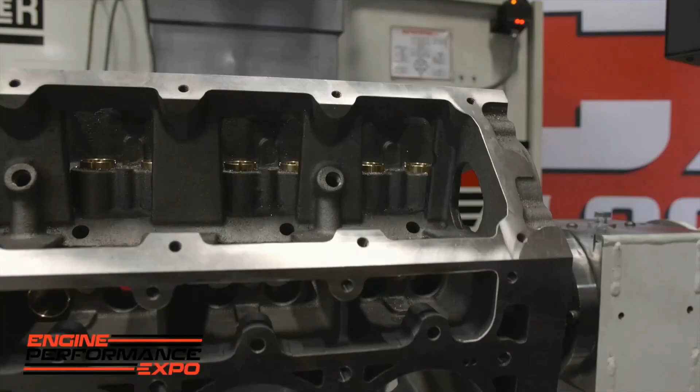I feel like we've had great success avoiding little glitches here and there, but every now and again you're going to have one with our videos. So these guys are re-racking the film on the film projector. Yep. Oh, wait. Bottom line, we're going to get to it as soon as is possible. They're going to figure out the video. And if not, you know, we got the man who is in the video right here, so we're going to try to deal with it.

But interesting, the conversation that was just happening off the air. We do not remain silent in between these sets. You were talking a little bit more about Spintron, and what Warren was saying. People are very interested in the pressure on the valve train, and Warren was kind of delving into that area a little bit. Yeah, so a couple of the questions had been about, well, the Spintron doesn't simulate the effects of the pressure or negative pressure in the intake tract and the exhaust.

Well, as Warren was talking about earlier, there's all of these dynamics, these pressure waves. Even Billy was talking about it, that you've got these pressure waves. So that pressure isn't static, it's very dynamic. And the whole other part of this to me is that if you take the fact that that's a variable and it's going to change engine by engine, by not having that, you're reducing the noise that could confound your information, because at the end of the day, what you're trying to do is make that valve train system stable.

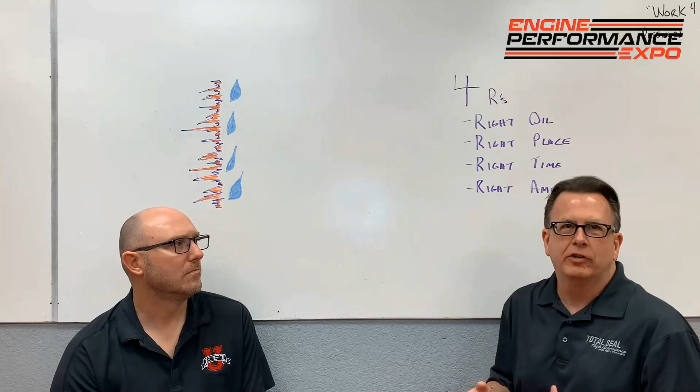We've always been taught, you know, father to son, son to daughter, to their children, that a fat tune-up's a safe tune-up. Sure. Well, maybe there's some validity to that. From my side and where I sit, this is nothing but bad. We're introducing too much fuel. We've got a very fragile relationship now between the ring and that cylinder wall, the oil, and we come in and we literally pour a solvent in there.

We break the oil film down so it has no ability to lubricate, and we ultimately end up burnishing the cylinder wall. Instead of wearing those fine peaks down and getting that really beautiful finish, we end up rolling all those peaks over and folding the metal. Now, this is easily seen when we take the engine apart. Instead of this nice, bright, silver, shiny, sparkly cylinder finish, we've got this dark, dull black. That's a burnished wall.

So Keith, what usually takes the abuse? Is it the ring or the cylinder wall? That's an excellent question. It is the cylinder wall. Okay. 99% of the time, I've seen the rings that have come back out. They're perfect. There really is no damage to the ring, but we're back apart, back out of the car, doing that work over again, right? We got to hone it again. Yep.

Put it all back together, and hopefully, we'll say on this second or third time around, we've done our due diligence and gotten a good fuel map into this thing, whether it be fuel injected or carbureted. We've got the fuel curve pretty close to right, so now we can get it broken in and get everything seated up and get it happy.

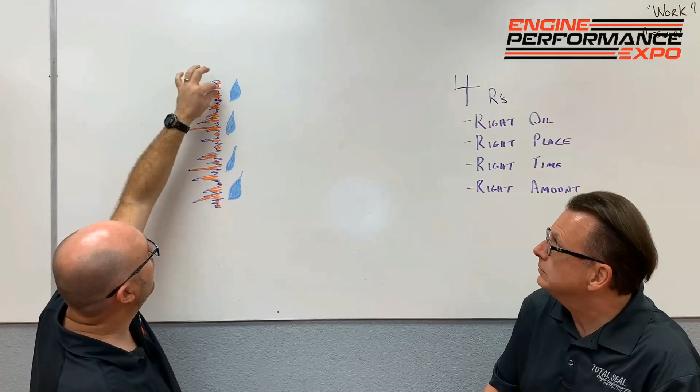So we have a little drawing behind us where we spent a lot of time talking about the surface finish, the peaks, the valleys, and how that valley is a reservoir for the oil, right? So you kind of drew here, this would be our cylinder wall, and the purple lines are those kind of peaks and valleys. Now the orange in there, that would be the oil that's filling that reservoir. That's what's doing the work of that reservoir. That's our storage tank. Yep.

So we come in here and we do the old-fashioned safe tune-up. You know, rich is safe and fat is good and everything else. And what you have is the fuel droplets here that, you know, we're not using for combustion. So what happens is it becomes a solvent, and that fuel dilutes that oil mixture, basically washes it quickly off the cylinder wall. And now there's nothing to really protect that high friction loading between the cylinder wall and the ring, right? Damage done.

Yeah, so obviously if a guy just buys a new carburetor and puts it on the engine, it's probably going to run pretty good. Do you see more problems on the carburetor side or the EFI side? Not to pick on EFI, but I'd say it's probably more to the EFI side, simply because, and you're the expert here, that's great, I got more work to do, it does not have a proper startup map in it.

Sure. Many of the guys that I get that we'll say are very much novices, the guys that need to come and see Ben and take the class, myself included, because I'm no expert, will fire this thing up. It's just fat as could be, and 3-4 days, a week, a month later, they're going to finally get it to somebody that can do some tuning on it. Well, at this point in time, the damage is done.

But it can happen with a carburetor. I have had the instances where, you know, 14 pounds of fuel pressure is going to lift that needle and seat, and it's going to just be gobbling fuel like it's going out of style. Yeah, we've all seen that, right? It does happen. Pressure, you know, float bowl's full, it holds the needle and seat open, it dumps right in there.

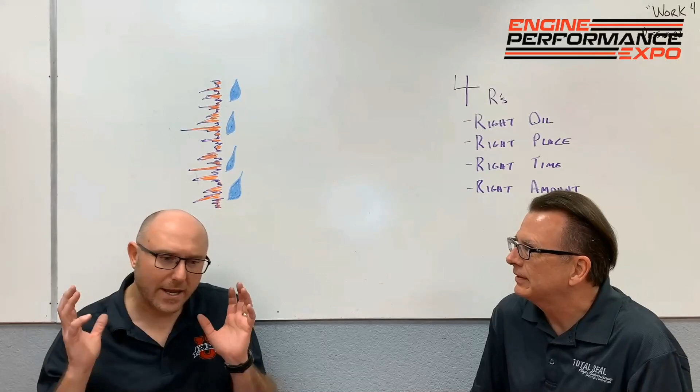So how long do you think it takes on a brand new, perfect, fresh startup? You know, how bad does it have to be? Are we talking like only a few guys ever see this happen if they get really unlucky? Or is this a common thing, like really washing that oil? This is a common thing. I don't want to necessarily say a daily phone call, but certainly a weekly phone call. That's a lot. I mean, that's 52 times a year at least.

And I will say, there's more than just myself at the shop. Yeah, so multiply that by at least 3 or 4. So, you know, I don't want to paint the picture that the engine's delicate per se, but the reality is, if we're using microscopic measurements to see how sharp those little peaks are, then it's really not that hard to fold them over rather than work them in like you're honing that. Slowly let them work their way down. Wear them off, not roll them over.

So we want to be extremely careful about the initial tune-up for the engine, especially with regards to flooding the engine. You know, if that happens, stop. Let's take the plugs out. Let's get that fuel out of there. Absolutely 100%. Again, working with guys, they've got this problem, it's smoking, it's got blow-by, it's got all these, and we discuss, hey, tell me how it went. How did the initial startup go?

Oh man, it took us 3 days to get it started. We had fuel running out the tailpipes. Wrong pumps, wrong injectors, wrong this, and we finally got it running. Damage done. This is an engine that hasn't even started yet, and it's already been hurt.

I think it's easy for guys to say, oh, I don't have to worry about that because I have a carburetor. But what happens a lot with a carburetor engine is they'll put the distributor in 180 out. So you're cranking and cranking, and the thing doesn't start, and it's popping or banging. Well, the same thing's happening there as if I had a bad tune-up in my startup map for an EFI system. Absolutely. That draw on the intake stroke is still signaling that carburetor. It's still pulling fuel in, and every time it doesn't start, what are we doing? We're hitting that accelerator pump a few more times, and we're just loading it down with fuel.

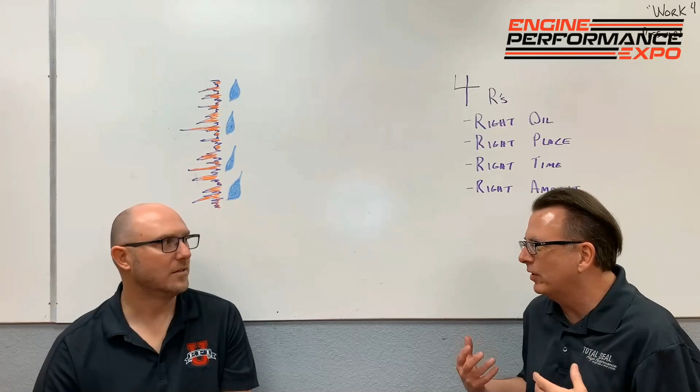He sent me a little Pepsi bottle full of oil, and I was going to send it out to Speed Diagnostics to have it checked, but I didn't need to, because after it sat on my desk for an hour, the fuel settled out of the oil, and it was like, C12.

Yeah, no smoking, right? No smoking in here.

And that all came down to the place that dynoed the engine ran on their dyno carburetor, which was fantastic. Sure. A Holley carburetor. Take that off, though, and now you go home. Put on a Quadrajet. Sure, yeah. Or even another Holley that maybe wasn't tuned to it or whatever, right?

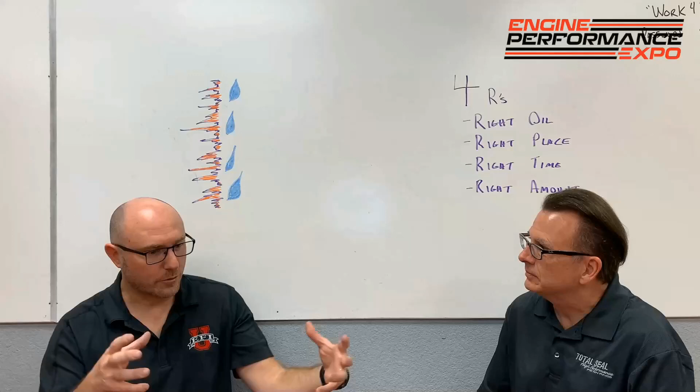But that's interesting that you bring that up, because a week or so ago, I was actually doing some back-to-back testing on an engine with a brand new, one of those really slick Generation 3, they call them Gen 3 Holley Dominators. I don't know if you've seen them, they are slick. Yep. But like a week and a half ago, Holley released a new product called the Terminator X, where it uses a carburetor-looking EFI throttle body. It looks identical to the carburetor, except it's EFI.

And so I did some testing back-to-back on the same engine, and what I wanted to see was, A, is there any difference in power between them? Obviously, that's what everybody wants to know. But really what I want to know is, how much work is it going to take me to get these things to run? So what I want to do is take you guys to the back, I got both of them on the bench next to each other, kind of taking it apart a little bit, and walk you through the differences between carburetor and EFI, and then talk a little bit about how we're going to get that tune-up right.

And I'll just do spoiler alert now. Ultimately, they pretty much made identical power, but that's kind of what you'd expect from a carburetor type throttle body and a carburetor. Yeah. The difference was, holy cow, was it a lot of work to get that carburetor to be as good as the EFI in really short order. We made a couple of hits on the dyno, boom, that thing was running. And I'll show you guys how we do that.

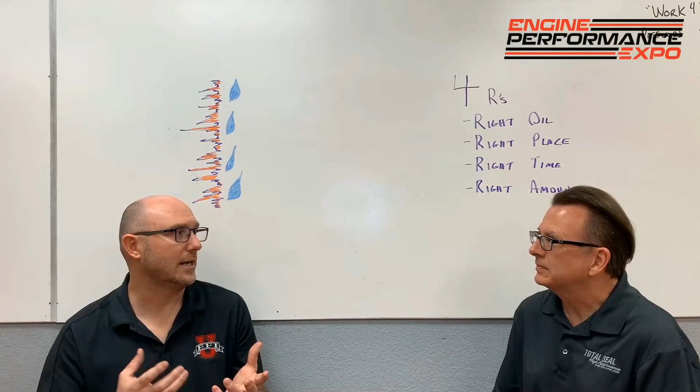But ultimately, it wasn't so much I thought there was going to be a big difference in power. What I wanted to know is how much work it was going to take to get a tune-up that was acceptable. And I think what a great time to be in the racing industry, what a great time to be alive, because the technology has come to a point where we don't have to do that much anymore. You know what I mean?

Like, we've come to think carburetor tuning's easy. Well, it's not that carburetor tuning's easy. It's just that when you got it out of the box, most of it was already done for you. We have 80 or 100 years of guys tweaking and tuning carburetors. So the end product that a guy gets now is so good, you can put it on 10 different engines and it'll fire right up and run and go. And maybe you tweak a jet here, power valve there, whatever. But for the most part, the real work was already done.

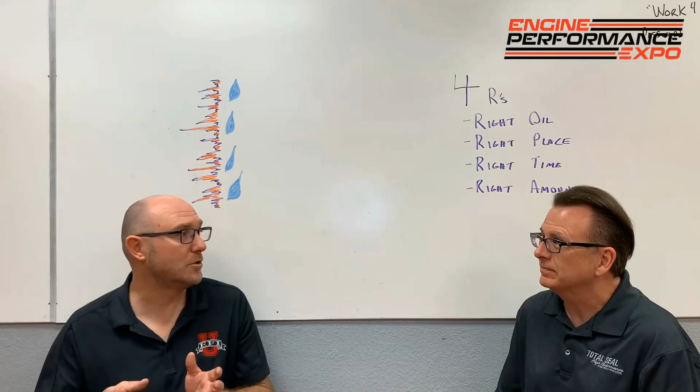Not so much with EFI. I mean, EFI's been around a good 20, 30, 40 years now, but the state of refinement isn't anywhere near what a carburetor is. And so I think what is largely a problem for you guys is people start out with this idea for a project, they build this whole engine, they probably listened to a couple of your seminars and talked to their machinist and got all that stuff right, but they didn't really have the knowledge or skills to get that refined tune-up to hit go and have that thing fire up and start. And I think that's where a lot of that fuel distribution issue, fuel washing the cylinders came from.

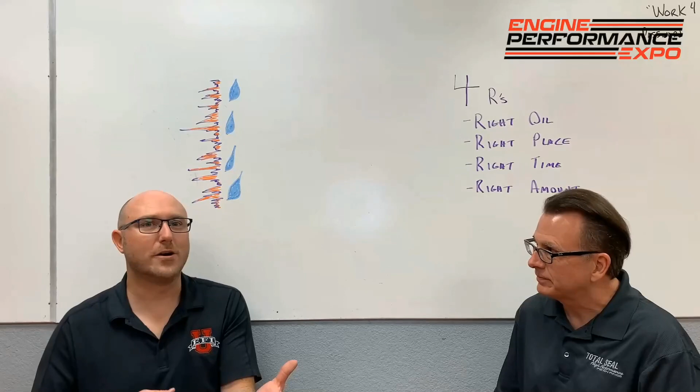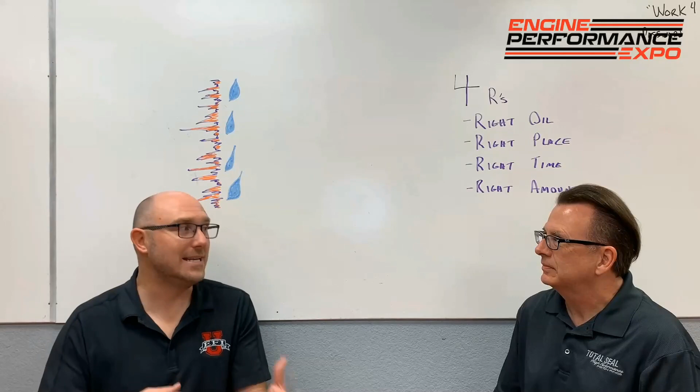But what's exciting about some of these new products is Holley realized that was a problem. And who better to realize it than Holley, who does nothing but make fuel systems. Yeah. So they said, what if we could give you an EFI system that not only looked and acted like a carburetor, but you could start it up and get your car running as easily as you did with a carburetor. And they did a fantastic job with that.

I was very impressed. If you want, we can walk to the back of the shop and I'll take a couple apart and show you, and we'll talk about it a little bit. Love to see it. All right, let's go check it out.

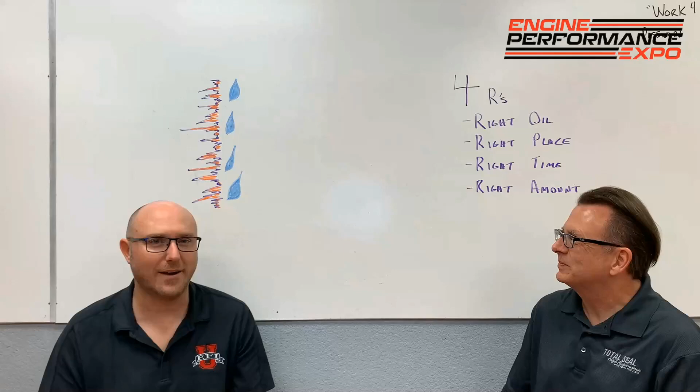Hey guys, okay, check it out. We're back in the shop here, and I've got a couple examples of new generation Holley equipment that could maybe make your life a little bit easier in terms of getting up and running quickly and accurately as fast as possible. Now, whether you're a carburetor guy at heart and you'll never change, or you embrace the new technology and you're really interested in the EFI stuff, I got a little bit of both to show you. So I thought I'd take a couple minutes and point out a few cool things.

So on this side, what I have is an 1150 CFM Gen 3 Ultra Dominator from Holley. Really nice improvements they made in these carburetors in terms of the way that they're radiused in here now, the way the air bleeds are all located easy to get to. They even added an idle air bleed like on an EFI car where you've got an idle air adjustment that you can make. You basically can go right here in the middle of the carburetor, and there's 4 holes that go around. I don't know if you guys can see those or not, but those are basically adjustable amount of air that you can use to get the idle speed you want.

Rather than the old-fashioned way to come over here and grab the idle stop and turn that. The reason that you don't want to do that is even though it's raising the throttle blade and giving you more airflow, it's changing the relationship of the throttle blade to the idle transfer slot in there. And then what happens is as you start to open the throttle, you get a lean or a dead spot there as you've used up most of that idle transfer slot, and there's not quite enough signal yet to start pulling on the main circuit.

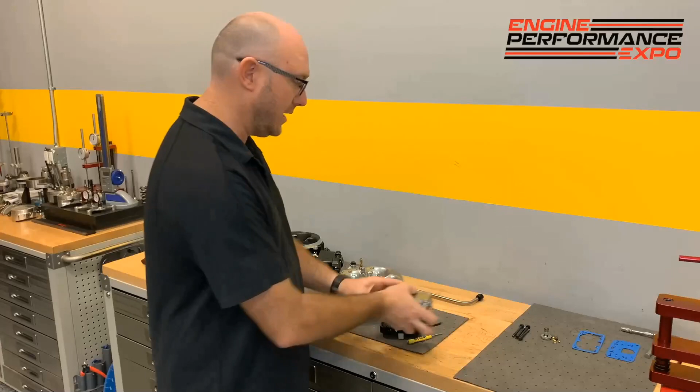What can happen if you get a little piece of trash in there is that that needle and seat can't close. Well, when that happens, it just keeps filling the fuel bowl, which then transfers that fuel out of the bowl in this vent, and it tends to go over here and pretty much flood the engine. So when Keith and I were talking about protecting that cylinder finish, that's one of those things you want to watch out for. So you can grab a wrench and a screwdriver, and you can unscrew this and actually pull that needle and seat out and remove any debris in there.

So that's really a good thing to check before you go to start the engine, or in this case, even turn your fuel pump on. And make sure that your float levels are set correctly. That way you're not dumping a bunch of raw fuel in the engine, washing that fuel off the cylinder wall, and then our rings can't seal. So that's the first thing.

Then we talk about, well, geez, carburetors, just take them out of the box and they work. Well, they only work so well because for the last 60 or 80 or 100 years, companies like Holley and other tuners have made all the adjustments necessary. So if you just look at how complicated this little metering block is for a second, think about what's going on here, you might understand what I'm talking about.

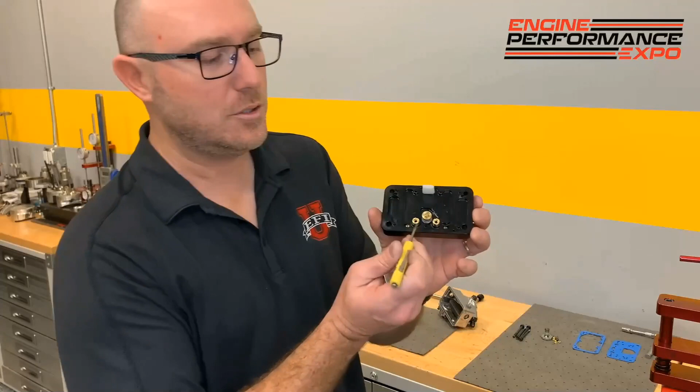So most people who have ever looked at a carburetor are familiar with the main jets. That's these two guys here. What these are is a calibrated orifice that you can screw in, and they're interchangeable. Holley makes tons and tons of different size jets that are precisely made. They're broached, and then they're flowed and measured to make sure they're just perfect. So what you don't want to do is go in there with a drill bit and hog those things out and make them bigger, because then you can't really control precisely the amount of fuel flow you've actually got.

But you can go up or down in sizes, and that basically takes care of the overall amount of fuel that the engine gets in any of the basic driving conditions. So it's kind of a gross change. Next to it, there's these tiny little restrictors here. I don't know if you guys can see them super well here, but these are our intermediate circuit restrictors. And basically they're a little jet that determines how much fuel or how much air is going to get into that intermediate circuit.

And then if we turn around to the other side, we see this thing here. This is called a power valve. It's basically an engine vacuum actuated sort of high power fuel circuit. If I unscrew it here, you can see what happens. I'm going to take the little gasket off. There's a hole where fuel can get through, and then inside here there's two little jet restrictors that can also be tuned. You can take a screwdriver, put it in there and unscrew that, and you can put a bigger or a smaller restrictor there. That's called a power valve channel restriction.

And what a lot of people don't know is that the numbers on the power valve, for example, this one's got a 5.5, indicate when the fuel gets delivered through that high power circuit, not necessarily how much. I've heard people talk about, oh, I've got a high flow power valve, so I'm going to get more fuel. You're really not, because it's the size of the orifice and the power valve channel restriction that controls how much fuel you get.

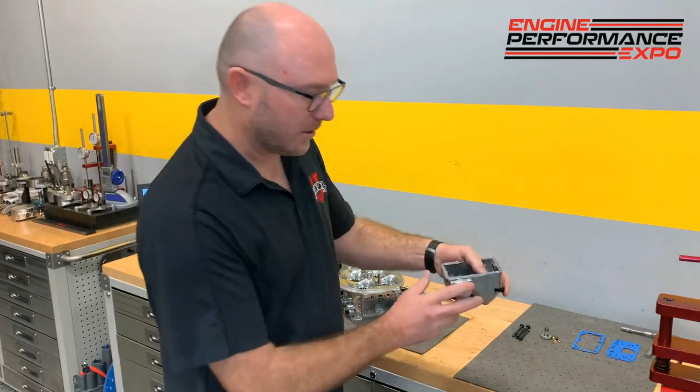So once we've got it idling and we're pretty happy with our little base tune-up here, we go down here and we go, what's this table? This is my accelerator pump. On the carburetor, there's a little mechanical lever here that sits on the side, and it actually goes this way. So as you move the throttle linkage, it presses on that lever. Fuel enters from the bowl down into the little diaphragm reservoir, and when you squirt this, it squirts a bunch of fuel right out into the engine, just to cover up that dead spot.

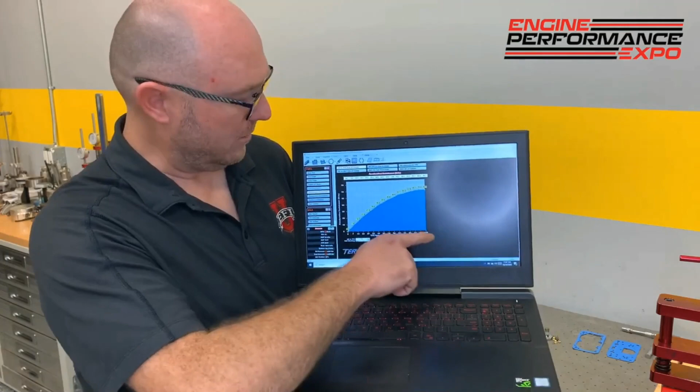When you start opening the throttle quickly, the air rushes in, and it takes a little moment for the fuel to get in through the metering block and through the restrictors and into your discharge there at the Venturi. So in your EFI system, just like you had there, you have a table, you go in, and it's how fast you're moving the throttle and how much extra fuel it should get. So now I have a tweakable, tunable accelerator pump system.

In the carburetor, I had to change the cams, and I had to change the squirter size and all that kind of stuff, and it was constantly working on it, draining the fuel bowls, filling them back up. You can ultimately do the same thing with a carburetor or an EFI system. The difference is my hands don't smell like gas when I use the EFI system.

So maybe you're the guy that's thinking, that all sounds great, but I'm really intimidated by this software. That laptop thing, plugging in a cable, that's scary. You know what? Holley's got an answer for that too. You come over here, it's got a little handheld 3.5-inch screen. It's touch screen. It's got one little plug-in. What I'll do is I'll take you guys over to the dyno, and I got one of these things sitting there ready to run. We'll plug this in, and I'll show you just how easy it is for you to go boop, boop, boop, and get your engine up and running.

That way, you don't have to be a tuning expert. Just like when you bought a Holley carburetor and it worked out of the box, with a few simple questions that you answer here, now you've got an EFI system that will just work out of the box. You're going to be happier because your engine runs right, you're not washing that fuel off the cylinder wall and hurting the piston rings, and you're ready to go a lot sooner.

And you know what? The end goal is to make a bunch of power and go play with the car, not necessarily have a million tools available that I can tweak and tune. I don't want to do that part. I want to go play with the car. So I'll tell you what, let's plug this thing in and go check it out.

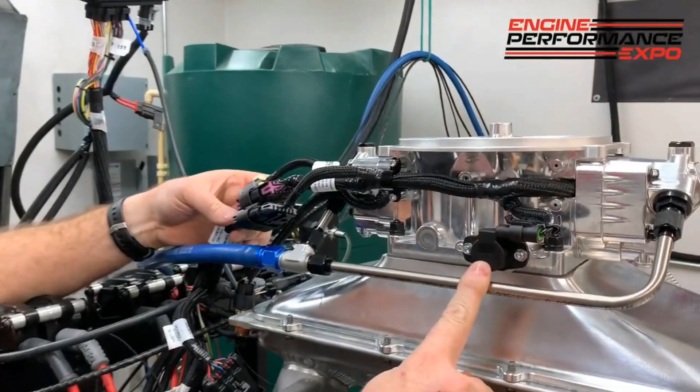There's 2 connectors that go to your throttle body, and inside the throttle body I have all my injectors. Got my idle control valve, got my throttle position sensor. Comes over here and we have an intake air temperature that could go into your air cleaner or your hood scoop or whatever, or you can put it down here into the manifold wherever you like. You have an ignition connector that you plug in and that'll go to your distributor, or in my case, my crank and cam sensors. I have over here coolant temperature. Lastly, got an oxygen sensor that's in the exhaust. That's about it. You're gonna hook up power, ground, and 12-volt switched ignition, and you're going to be ready to go.

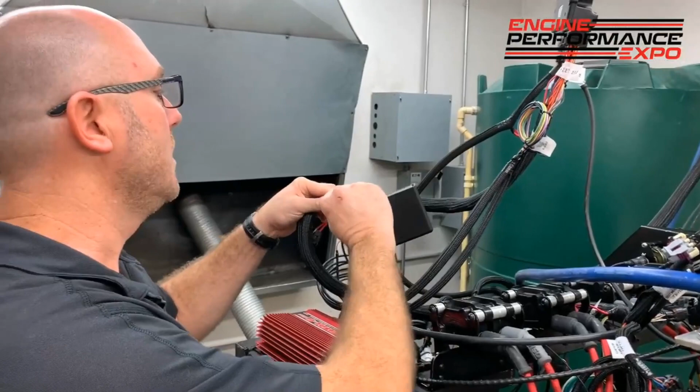Now, again, I said you don't have to have a laptop because Holley gave us a 3.5-inch touchscreen controller. So what I'm going to do is I'm going to show you how easy it is to plug this thing in. Come on over here, and as I come down the harness, you'll see there's labeled connectors that say CAN. They match this connector. I'm just going to simply plug this thing in real quick. It only goes one way. You really can't mess it up. And Keith, if you'd hit the power for me again. As soon as we hit the power, I can see I got power up there. Now my screen is live.

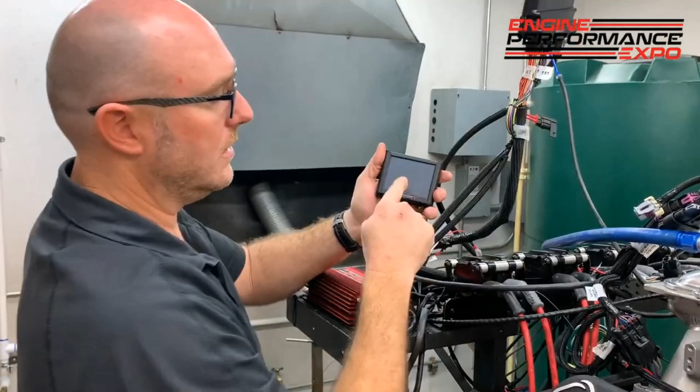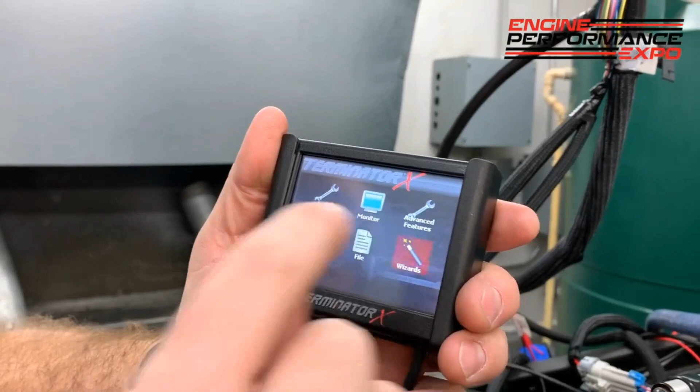Now, Lake, I'm going to have you come in real close here and show you how easy it would be to set up a brand new configuration. Can you see here where it says Wizards? So what I'm going to do is I'm going to touch Wizard, and I want to create a new global config file for this brand new engine that's never run before. And I want to make sure I get it right so I don't have issues with my ring seal and cylinder wall washing and all that kind of stuff.

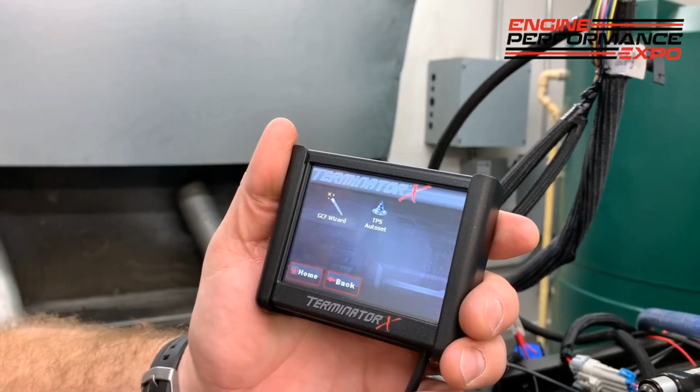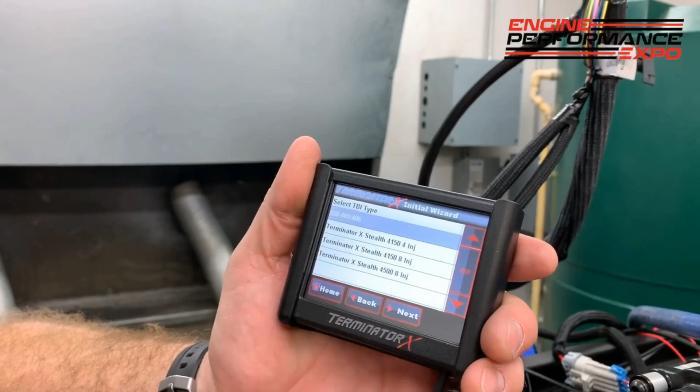So I'm going to touch that, and I tell it, is it multi-port injection, throttle body injected, or direct injected? Well, for ours, obviously the Sniper 4500 throttle body is a TBI. I hit next. Oops, sorry, TBI and then next. Now it just gives me part numbers. Do you have a 4150 with 4 injectors, 8 injectors, or do you have a Stealth 4500?

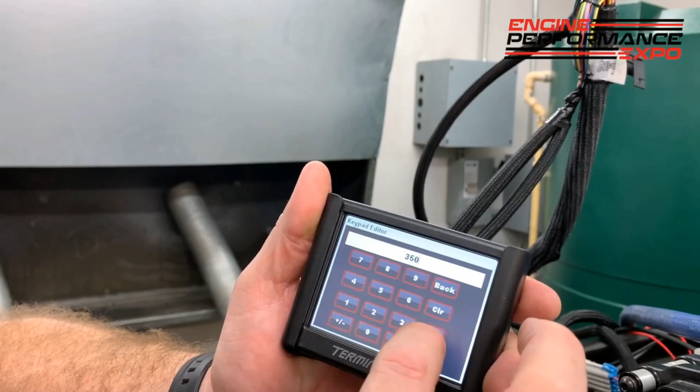Obviously, we have the Stealth. We go next. I tell it how many cylinders does it have? Well, it's 8. And then I'm going to put the engine size in cubic inches here. This one happens to be 350, and I'll hit save, and I'll go next. What's my target idle speed? This thing has a lot of camshaft, so I might want to have an idle speed of, let's say, 1400. Boom. Save that. Pretty easy so far.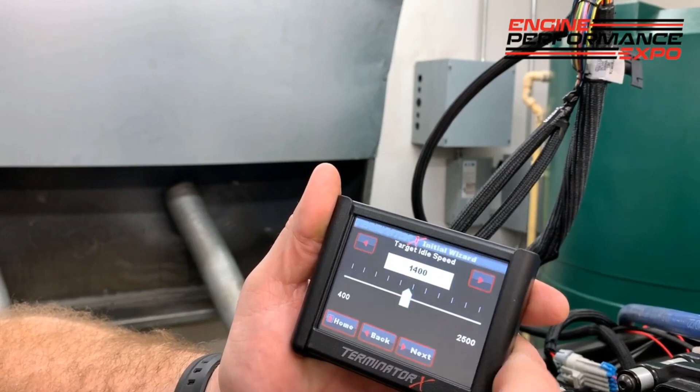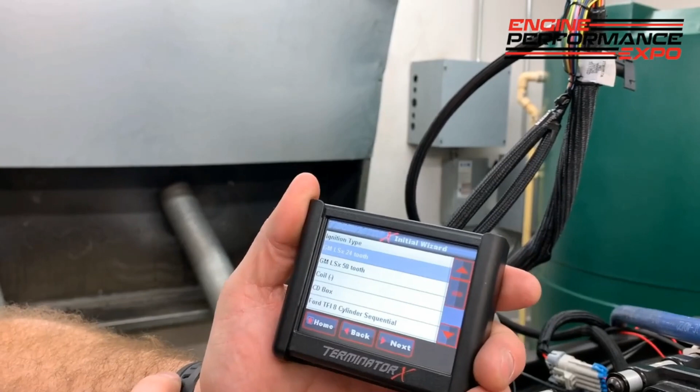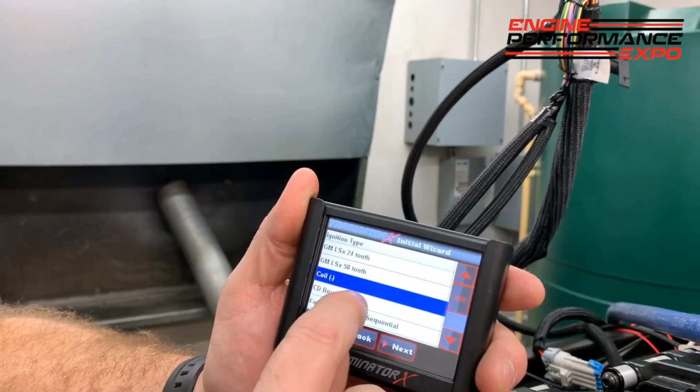Next, how big is your camshaft? It says below 235 degrees, between 235 and 260, and above 260. Well, this one's a little bit above that, and I'll go next. What type of ignition? If you have a GM LS, LSX with 24x, or you just got a coil. CD box would be like if you had an MSD. So let's say we got that, and I say next. Oops, sorry. Next. And then your fuel pressure, 43 or 60. Mine's set at 60. I go next. And check it out. This is really cool.

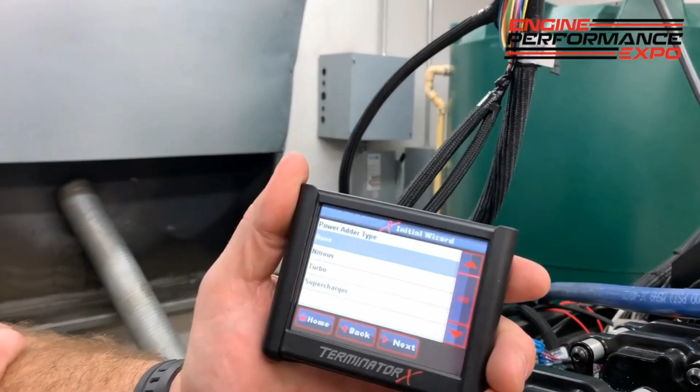Now it asks me, do you have any power adders? Do you have nitrous, turbo, supercharger? Remember, if you had a carburetor and you had an old reliable engine that's been running and you decide, you know what, everybody's doing all the cool stuff these days, I want to add boost, you're going to have to send that carburetor around and get all that recalibration work done, set it up for pressurization if you're doing blow-through or draw-through. There's a lot of work that goes into making a carburetor work, and honestly, a lot of guys run into trouble with ring seal from the tune-up not being right, all those other problems. Here, it's literally click a button.

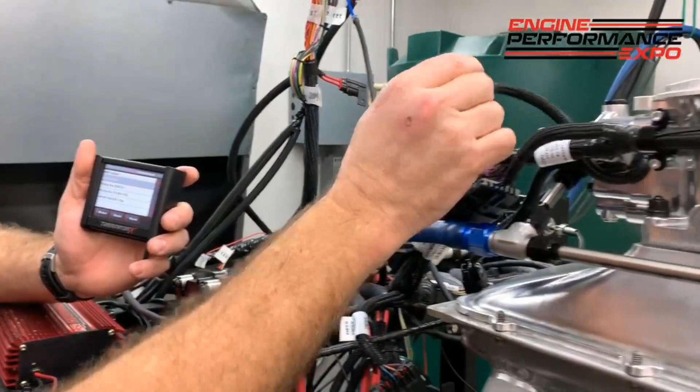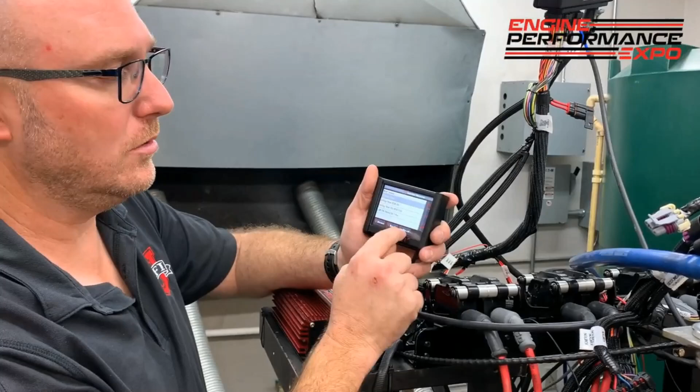Now, my engine doesn't have power adders, so I'm just going to go next and say none. And then I'm going to tell it, now, there's a connector here. If I want to add that power adder, I can just plug in a multi-bar MAP sensor, 2-bar, 3-bar, whatever I want there. But remember, there's one internal to the box that I'm using, so I'm just going to click internal 1 bar. And that's it. It's ready. All I do now is say start. It will load that file in, and you're ready to start. So I'm not going to load this particular one in because we said it had an MSD box, and I really have LSX triggers. But that's it. I hit start. We can load it in. We'll cycle the ignition. We'll go out there and see if this thing runs.

Once I do that, though, I can come back now, and again, I'm riding around in my car or I'm in the garage and I want to see what's going on. You can come over here and you can tune it. It's got some advanced features where you can select functionality, but most people use this multi-gauge monitor here, and you can see what all the sensors are doing. I've got manifold, coolant temp, throttle position, my ignition timing, all that stuff is displayed right there on the screen for you. And you can make tweaks and adjustments from the screen without having to use the laptop. Now, if you want to be fancy, you get really in-depth and you really want to tweak and tune, that's what the laptop software is for, and it has way more functionalities and features, but not everybody wants that, which is what makes the handheld really nice. So I'll tell you what, I'm going to put this away. Let's walk out there and see if this thing will start.

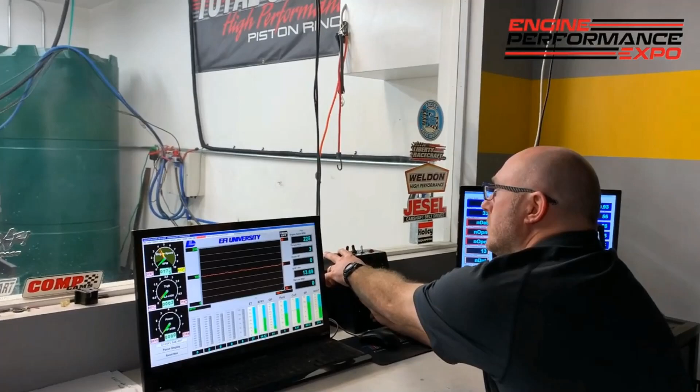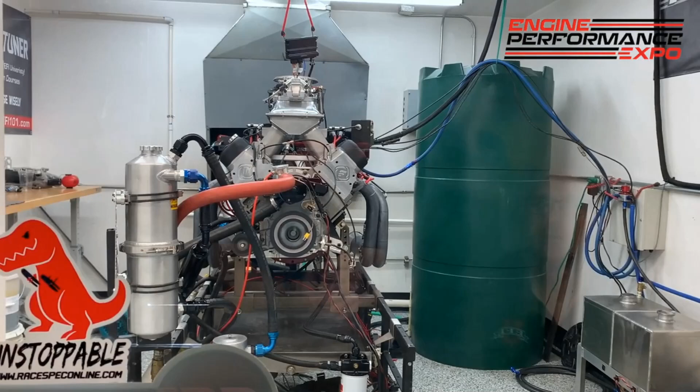All right, guys, we're here at the console. I got everything hooked up, and basically I have my software here. I can see on my laptop or on the big screen, and I can see all the live data as I'm doing a run. But all I really needed to do was load that calibration in there and tell it I got this camshaft, this engine size, whatever. Then I can come out here and get the engine started. So basically I got the ignition on, I got fuel pressure. Let's see what happens. Here we go. You can see it fires up, and that idle circuit is already working with the bypass valve to try to target my speed. So now I just let the O2 sensor correct to my target. We're good to go. We'll let it warm up, and we'll see if it runs good.

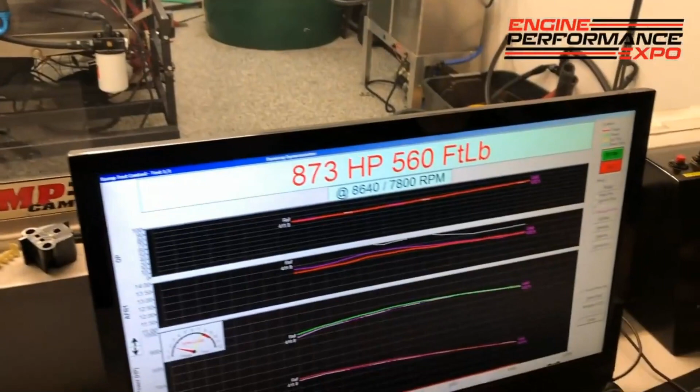What a day, what a day, what a day. Yeah, my brain is swollen. I've learned so much today. They told us, don't start cars. We are not going to listen.